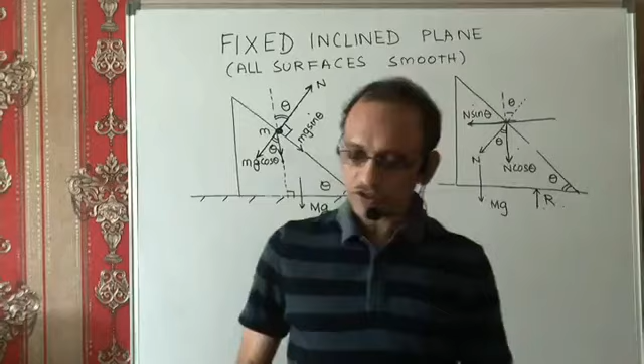While we are journeying into mechanics, one very important and critical element that we will encounter very often in problem solving and otherwise is the inclined plane element. And over a period of time, so many variants, so many variations around the inclined plane have emerged. And it is important to consolidate all inclined plane knowledge in one place.

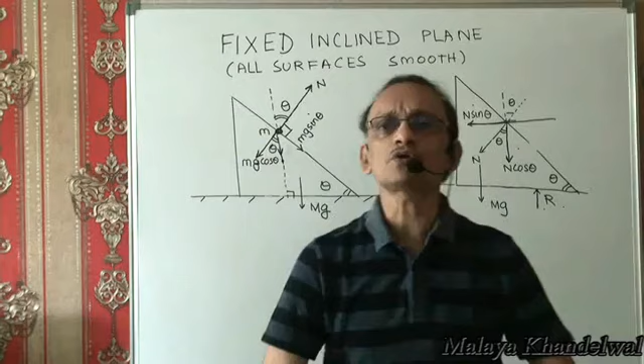It's important that we take delta steps and address all issues in all variants that we see in inclined planes. My objective in a few sessions is to give you a complete, holistic, comprehensive understanding of inclined planes. We start with an inclined plane whose surface is smooth, and we will initially look at an inclined plane that is at rest. Inclined plane not moving, a fixed inclined plane.

And slowly I'm going to release bundles of knowledge. From this point, a fixed inclined plane, I'm going to allow the inclined plane to move. And then look at the moving inclined plane in very many ways. Let's see what happens. All right. So here's our inclined plane. And there is a mass small m, a particle of mass small m, resting on the surface of a smooth inclined plane.

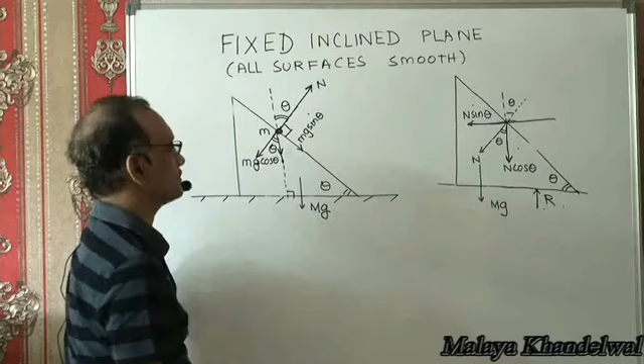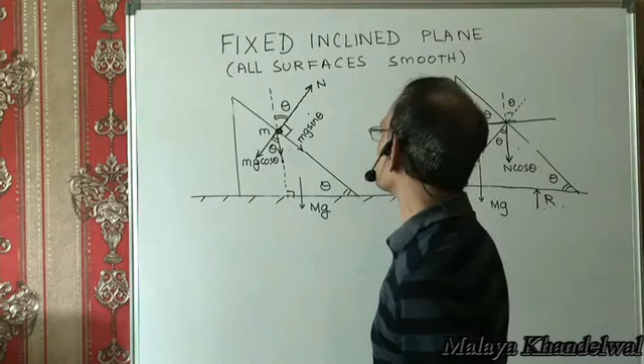So first things first, let's try and understand unequivocally, without ambiguity, the forces acting on small m. We are going to draw the free body diagram of the particle resting on the inclined plane, and we are going to draw the free body diagram of the inclined plane itself, right? So first of all, let me look at this small m. What are the forces acting on small m? Very clearly, there is mg downwards.

Vertically, this is the vertical direction, right? And there is normal reaction n, which makes an angle theta with the vertical. I hope you realize all these angle dispositions. If the inclined plane makes an angle theta with the horizontal, a normal to the inclined plane will make an angle theta with the vertical. Or you could have looked at it geometrically this way. This is theta, this is 90 degrees, this is 90 minus theta. So this will be theta, and then vertically opposite angle theta, and so on and so forth, right?

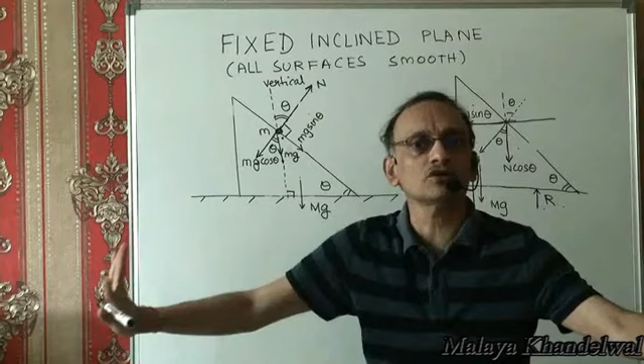And then we have n acting this way, perpendicular to the plane. That makes an angle theta with the vertical. So only two forces acting on small m. What are the two forces? mg like this, and n perpendicular to the plane. Yes or no? Now, since n and mg are in different directions, in order that we could deal with them in an organized manner, it makes sense to resolve all these forces in two mutually perpendicular directions.

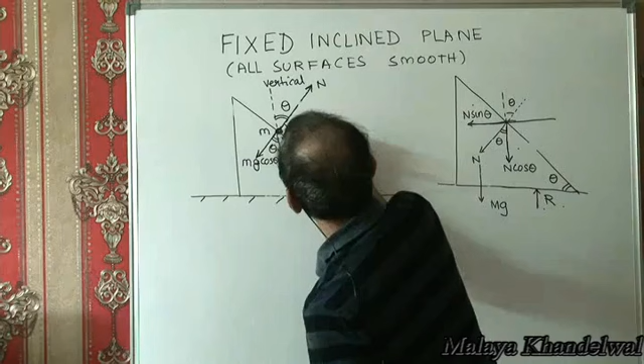What we could choose as two mutually perpendicular directions are, we could choose a direction parallel to the plane. This is the parallel direction. And a direction perpendicular to the plane. This is the perpendicular direction, perpendicular to the plane. So all forces in a certain sense can be consolidated in these two mutually perpendicular directions, or it could be any other choice, which is all right. Now, in the perpendicular direction, I could have resolved mg as mg cos theta perpendicular to the plane, right? And parallel to the plane would be mg sin theta.

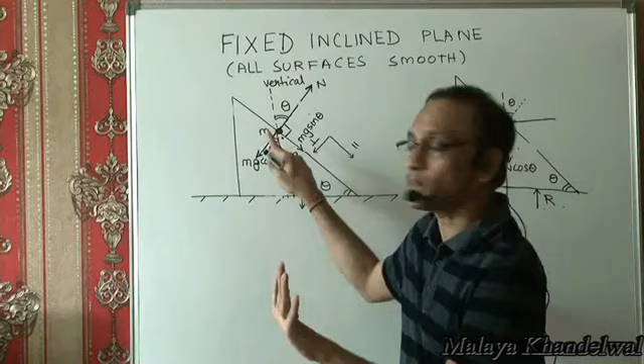So here we have the set of forces acting on small m: normal reaction from the inclined plane, perpendicular to the plane, and then mg, which could be replaced by two other forces, which is mg cos theta perpendicular to the plane and mg sin theta parallel to the plane. Yes or no, right?

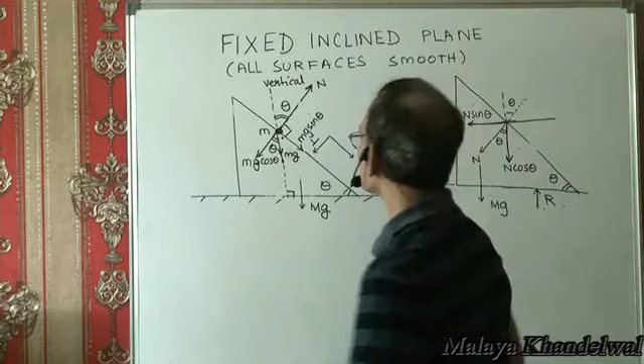Now, the inclined plane side of the story. So, on the inclined plane, what are the forces? Its weight, capital Mg acting downwards, normal reaction R from the ground. Now the inclined plane exerts on small m a normal reaction n this way, right? As a consequence of Newton's third law, small m will exert on the inclined plane a normal reaction n this way.

So then on the inclined plane, what are the forces? A normal reaction n, and who exerts this normal reaction n on the inclined plane? Small m, that is this particle on capital M. And then of course there is weight of the inclined plane, capital Mg, and there is normal reaction R. Now again, if you really think about it, in the vertical direction, the inclined plane has no acceleration. So n cos theta and Mg must balance R. R is a self-adjusting force, right? So R then, for the inclined plane, is capital Mg plus n cos theta.

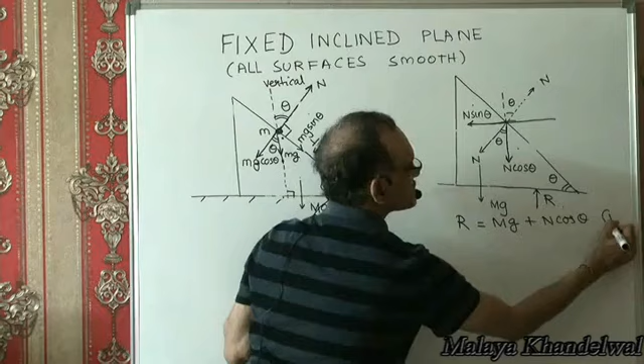Capital Mg plus n cos theta, right? In the vertical direction. Now, do you realize this n sin theta is unbalanced? And what would it want to do? It would want to cause the inclined plane to accelerate leftwards. So something has to prevent it from accelerating leftwards.

So what has to be done is, to keep the inclined plane fixed, we would have to counter n sin theta. So this n sin theta could have been countered, let's say, if I had placed it against a wall, for example. Or if the inclined plane was placed on a very rough surface, then the tendency of the inclined plane to move to the left owing to n sin theta would have been cancelled by frictional force acting on it to the right. Yes or no? Static friction acting to the right would have countered.

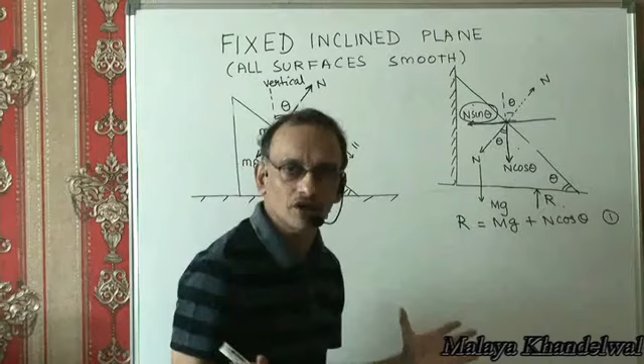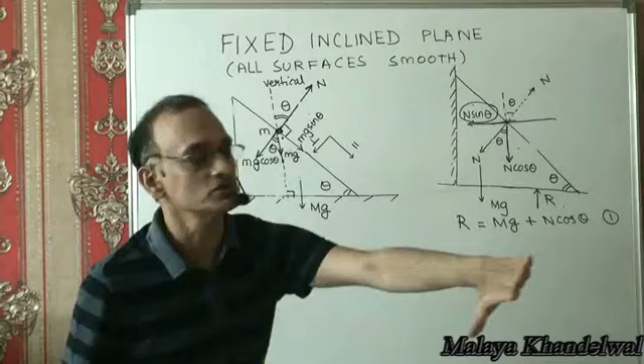One way or the other, by some means, we are preventing n sin theta from producing an acceleration on the inclined plane. The inclined plane remains unaccelerated, right? So this is the situation that we are talking of now. So unaccelerated inclined plane, fixed inclined plane, by some mechanical mechanism, n sin theta is countered. Now, look at small m.

Would you not want to believe that in a direction perpendicular to the plane, fixed plane, small m has no acceleration, because if in the fixed plane small m had an acceleration perpendicular to the plane, it is going to lose contact with the plane, right? So no acceleration in this direction of small m. That means net of all forces in this direction is 0. That means n must be equal to mg cos theta. But this is only for a fixed inclined plane. Only if the inclined plane is fixed will the normal reaction be equal to component of weight, which is mg cos theta. If the inclined plane was moving, we'll see very shortly that n is not mg cos theta.

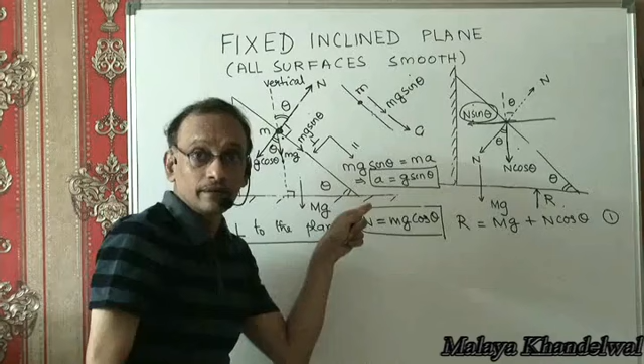Now, so on this particle, what's the only unbalanced force acting on this particle m? That's mg sin theta. That's the only unbalanced force acting. And what does this unbalanced force do? It produces an acceleration a parallel to the plane. So mg sin theta produces on the particle an acceleration a parallel to the plane, which means a then will be g sin theta. So on an inclined plane that is fixed and that has a smooth inclined surface, if a particle moves down the plane parallel to the plane, then its acceleration is going to be g sin theta. That's the story of a fixed inclined plane.

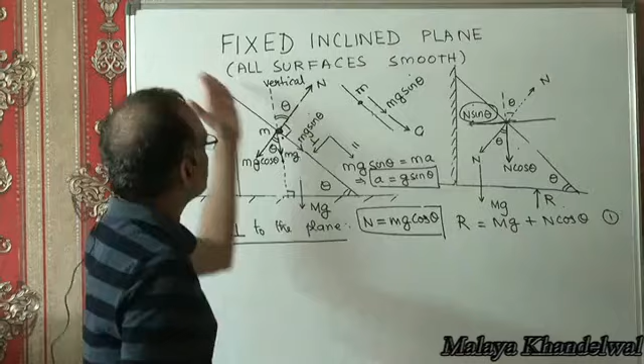What I'm going to next migrate to is I'm going to bear with the consequences of n sin theta not being balanced. That means I'm going to look at how n sin theta causes this to accelerate, and if n sin theta is left free to accelerate this, what would be the acceleration developed by the inclined plane on capital M? This is what I'm going to explore next, right? But I hope all of you understand this very basic premise of a fixed inclined plane whose inclined surface is smooth. The acceleration of a particle parallel to the plane is g sin theta. There is no acceleration perpendicular to the plane. Acceleration perpendicular to the plane would have caused the mass small m to lose contact with the plane. Yes or no? Thank you so much.

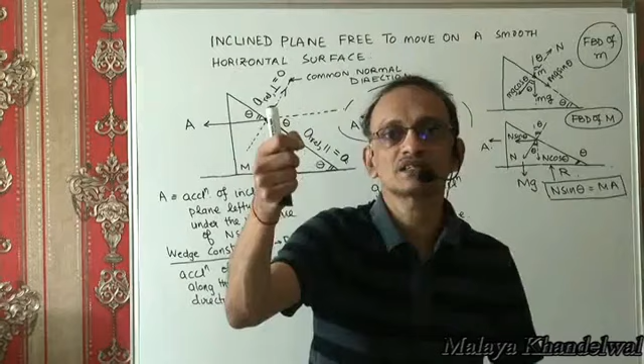As a follow-up from the previous situation where I looked at a fixed inclined plane, I'm now going to let the plane do what it wants to. I'm going to make it rest on a smooth horizontal surface. The inclined plane itself is smooth and there is a particle of mass small m moving along the plane, right? I'm going to have a detailed discussion of this, and we'll look at it in very many ways. All right.

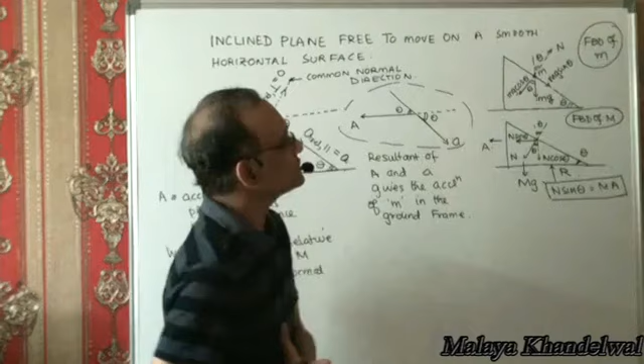So first things first. This is a particle of mass m resting on the inclined plane. What are the forces acting on it? There is mg, Mother Earth, and there is normal reaction from the inclined plane perpendicular to the plane, right? These are the two forces acting on small m. That far and no further. I'm assuming that this surface is smooth. Of course, if required, we could resolve mg perpendicular to the plane as mg cos theta and parallel to the plane as mg sin theta. But that's it. I mean, we could resolve it in other ways too.

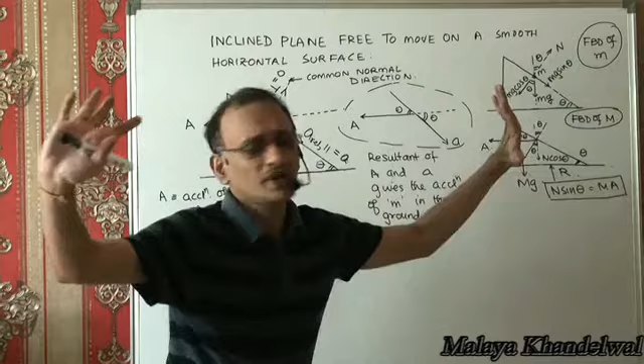But this is one of the ways we could resolve mg. If we want to deal with two standard directions, parallel to the plane and perpendicular to the plane, this is one thing that we could have done. Now, look at the inclined plane side of the story.

What are the forces acting on the inclined plane? This is the inclined plane. There is capital Mg acting downwards. There is normal reaction from the ground acting upwards, right? And if the inclined plane exerts on small m, N like this, small m will exert on the inclined plane a normal reaction N like this, right? Which could be resolved as N cos theta downwards and N sin theta leftwards.

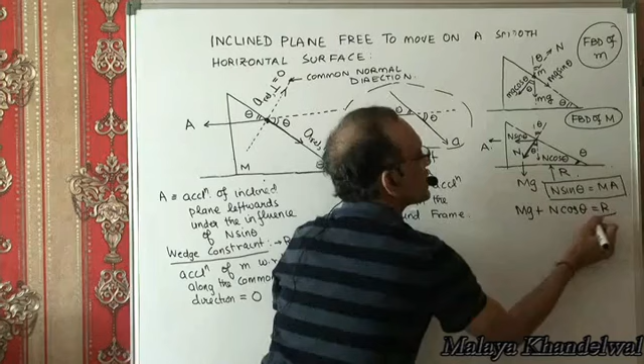Yes or no? Then from the ground, there is a normal reaction acting on the inclined plane, preventing the inclined plane from having a vertical acceleration. So essentially, from the inclined plane perspective, Mg and N cos theta balance R. R is a self-adjusting force. It manipulates itself in a manner that there is no net acceleration of the inclined plane in the vertical direction, right? That's as far as this is concerned.

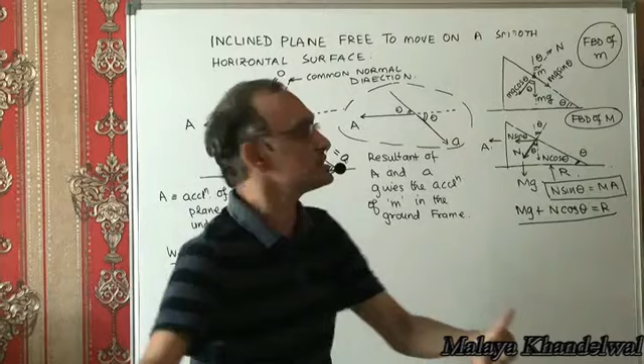But what about N sin theta? Now, there is nothing to counter N sin theta. There is no friction. Everything is smooth. And there are no other forces acting. So, N sin theta stays put as an unbalanced entity on the inclined plane, capital M. This is capital M. So, N sin theta produces on capital M a leftward acceleration, capital A. So the inclined plane has a leftward acceleration capital A owing to the influence of this N sin theta. Yes or no? I hope all of you are in tune with me and in sync with whatever I'm saying. Right?

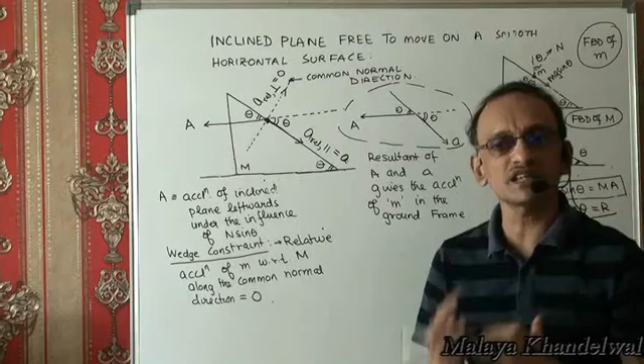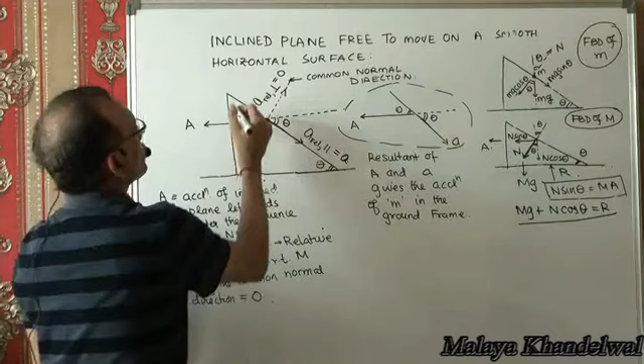Now, if you are an observer sitting on the inclined plane, what would you observe about this particle? You would observe that the particle is sliding along the plane. That means, what would you want to conclude? You would want to conclude that the relative velocity of small m with respect to capital M is parallel to the plane. The relative acceleration of small m with respect to capital M is parallel to the plane. There is no relative motion in this direction.

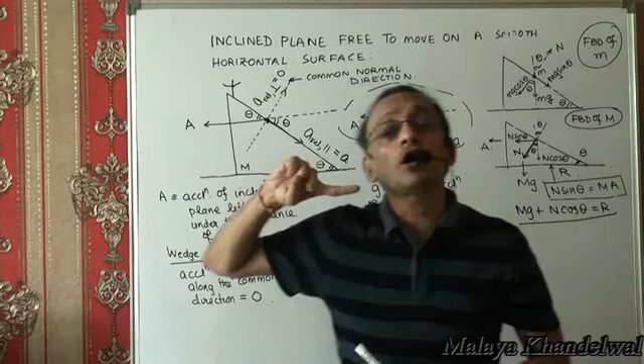Along the common normal, if there was relative acceleration or relative motion of any kind, then it would result in loss of contact. There is no loss of contact. So, relative acceleration perpendicular to the plane is 0. But there is non-zero relative acceleration down the plane. An observer on the plane would not find this particle to have an acceleration perpendicular to the plane, but would observe an acceleration small a parallel to the plane. So this is the relative acceleration of small m with respect to the inclined plane, and at least we know its direction, it's parallel to the plane.

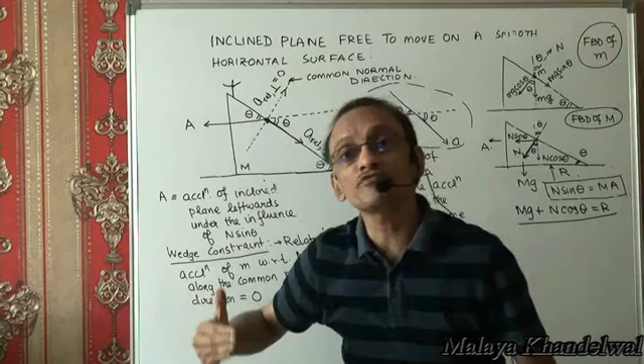And the fact that there is no relative acceleration perpendicular to the plane between the inclined plane and this mass m is because of a wedge constraint. That's the condition for it to maintain contact. So no relative acceleration in this direction. So whatever acceleration the inclined plane has in this direction is also the acceleration of small m in this direction, so that the relative acceleration condition equal to 0 is preserved. So on small m, this is small m.

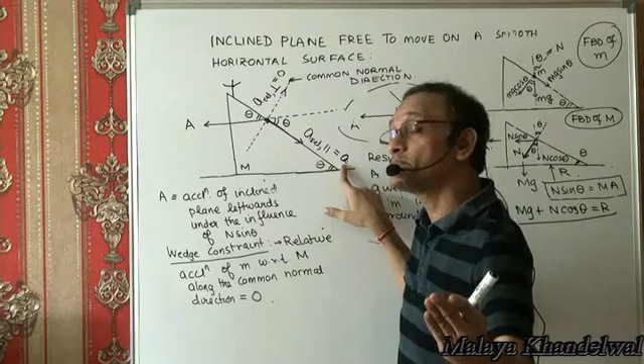What are the two things that you are going to see on small m? One, there is relative acceleration like this, right? That is the inclined plane observer's perspective, this small a. This is not, however, the acceleration of small m in the ground frame. No, this is not the observation made by a ground observer. This is the observation made by the inclined plane. The inclined plane observer reports that small m has an acceleration like this. Yes or no, right? So this is only relative to the inclined plane.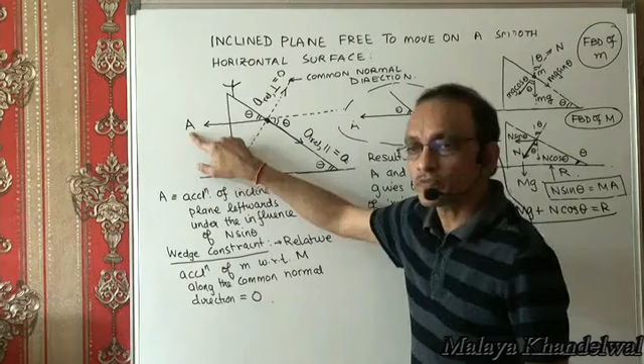But what about the inclined plane itself? Is it fixed? No, it has an acceleration capital A to the left. So this is the observer's acceleration. And what is the observer reporting? This. So if I add the observer's acceleration to the relative acceleration it is reporting, relative acceleration added vectorially to the acceleration of the observer, that means capital A and small a, would give me what? Acceleration of the particle m in the ground frame. So in the ground frame, you would see a resultant of the relative acceleration of small m plus the acceleration of the inclined plane. The inclined plane reports this. So the reporting of the inclined plane plus whatever is happening to the inclined plane will give me a ground observer's framework.

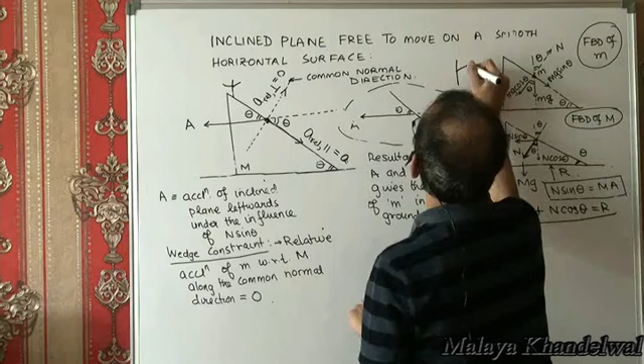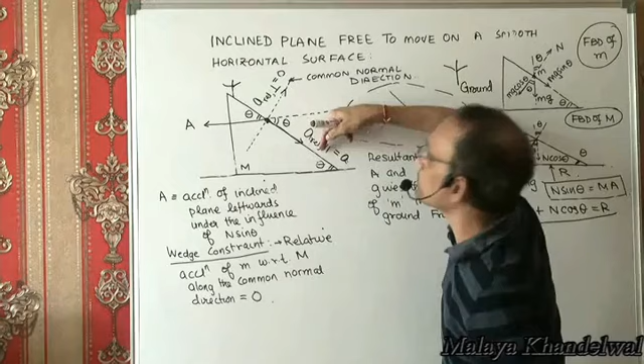If this was a ground observer, then the ground observer would think that the resultant of the relative acceleration plus the acceleration of the observer, which is the inclined plane, capital A, this angle is theta, as you can see, would give me the acceleration of the particle m in the ground frame. In the inclined plane, small a. In the ground frame, resultant of small a and capital A, that's the story in the ground frame.

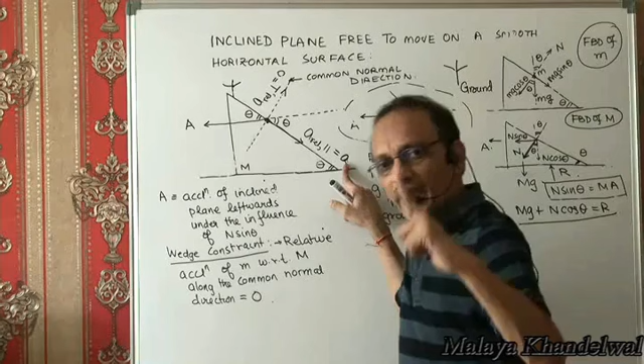Yes or no? Right? I'm going to build on this. Once you understand this clearly, small a henceforth is what? Acceleration of small m with respect to the inclined plane. Obviously, it's along the plane. And capital A is what? Acceleration of the plane.

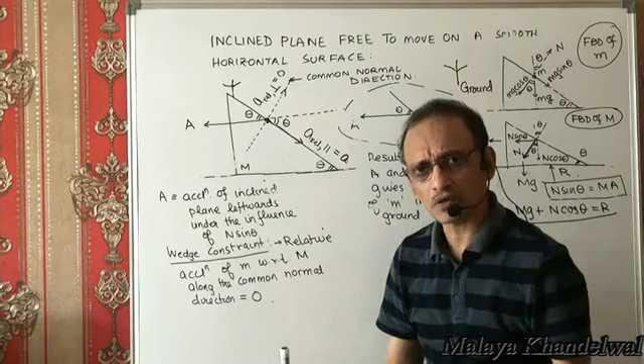If I add these two, this is the observer and this is what the observer is reporting. The kinematic status of the observer and its reporting will together give me what? The absolute acceleration of the particle, that is the observed, right? I'm going to build around this.

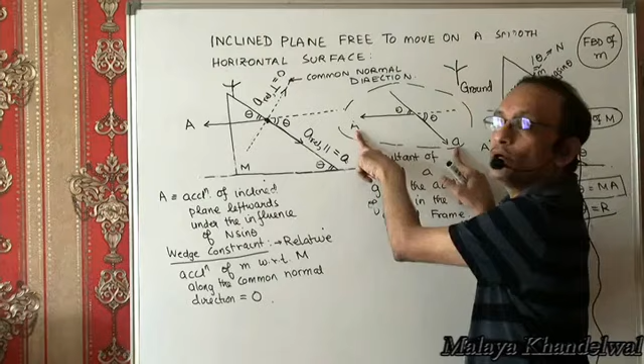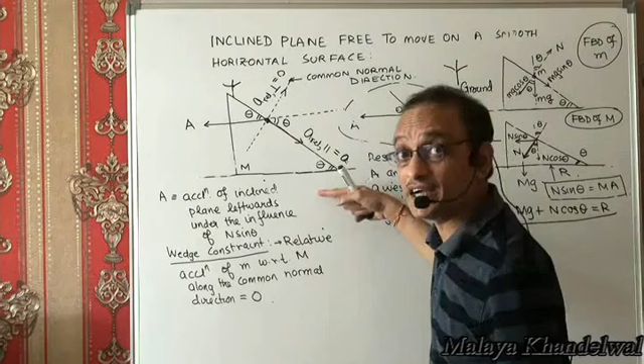So I'm going to write equations of motion for small m, keeping in mind that whatever forces act on small m will produce a net effect, which is the resultant of small a and capital A. The net effect of small a and capital A would be the effect of all forces acting on small m. Now, whether I choose to resolve forces perpendicular to the plane and parallel to the plane and write equations of motion of small m in those directions, or I resolve forces vertically and horizontally and look at the effect in a horizontal sense and in a vertical sense, that does not matter.

That is only cosmetic. But in principle, this is what I'm going to deal with. This being the effect in a ground frame perspective, small a and capital A put together is a net effect in the ground frame, and I'm going to look at forces acting on small m that will produce this effect. Cosmetically, I might do very many things, but in principle, this is what I'm going to deal with.

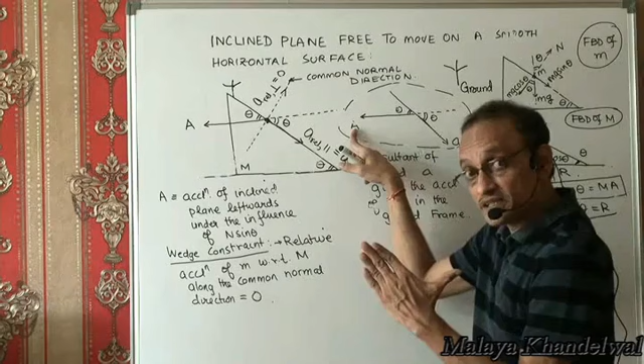In my session that is to follow, I'm going to come down to equations in two mutually perpendicular directions. Aim at solving capital A, the acceleration of the inclined plane, and solving small a, which is the relative acceleration of small m with respect to capital M, that means the inclined plane. And then, of course, I could find the resultant of these two. That will give me the net acceleration in the ground frame. So that's my agenda for the session to follow very soon.

To eventually converge to a solution of the inclined plane problem based on some of the inputs that I gave to you, where I said small a is the relative acceleration of the particle with respect to the inclined plane, which would be evidently along the plane, and capital A is the acceleration of the inclined plane itself because of an unbalanced N sin theta, which we saw earlier. Then the resultant of small a, relative acceleration, with the acceleration of the observer, would give me the acceleration of the particle in the ground frame.

Now, therefore, I have to essentially find the resultant of small a and capital A so as to perceive the acceleration of small m in the ground frame. So I resolve capital A as A cos theta parallel to the plane and A sin theta perpendicular to the plane, right? So essentially, if I add A cos theta, A sin theta, and small a, this resultant will give me the acceleration of small m in the ground frame, right?

Therefore, in the ground frame, what's the acceleration parallel to the plane? Small a minus capital A cos theta. Small a minus A cos theta is the acceleration of small m in the ground frame. So this is all in the ground frame. Whereas A sin theta is the acceleration perpendicular to the plane, as seen by a ground observer. So the ground observer sees a minus capital A cos theta parallel to the plane and capital A sin theta perpendicular to the plane on small m. So this is the effect of whatever is happening on small m.

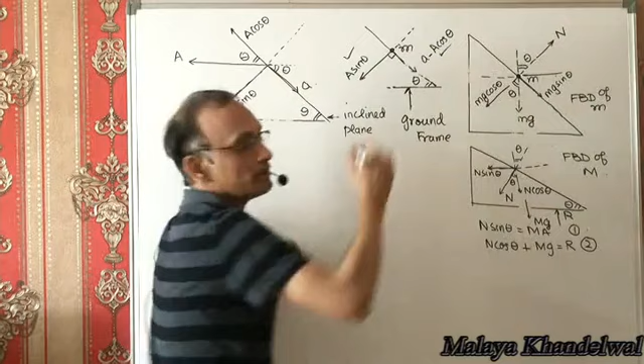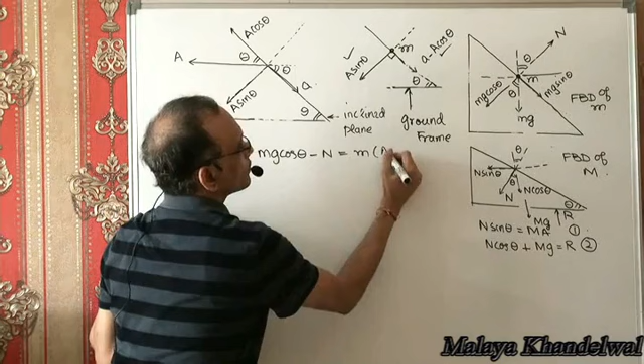What is the cause? So what causes A sin theta on small m? All forces perpendicular to the plane will result in capital A sin theta. What are the forces perpendicular to the plane? Mg cos theta minus N. Mg cos theta minus N will cause A sin theta, right? So that's equation 3.

So equation 1 was like the inclined plane having an acceleration capital A, as we saw earlier, because of N sin theta. N sin theta is capital M into capital A, right?

Now parallel to the plane, what's the acceleration? a minus capital A cos theta. And what causes that? All forces parallel to the plane, that is mg sin theta. So mg sin theta causes small a minus capital A cos theta. This acceleration. That's equation 4, right?

So what I'm going to do is use equation 1, which is this equation, and equation 3, which is this equation, and first solve for N. From this equation, as you can see, I can replace N by capital M A by sin theta into this equation. And first I'll solve for capital A, the acceleration of the inclined plane. See what it turns out to be.

So this is mg cos theta minus N, replaced by capital M A by sin theta, equals small m a sin theta, right? I transpose this to this side. I get mg cos theta equals A into, if I add these two, capital M plus small m sin square theta divided by sin theta. That's what happens. A then turns out to be mg cos theta sin theta divided by capital M plus small m sin square theta. That's the acceleration of the inclined plane.

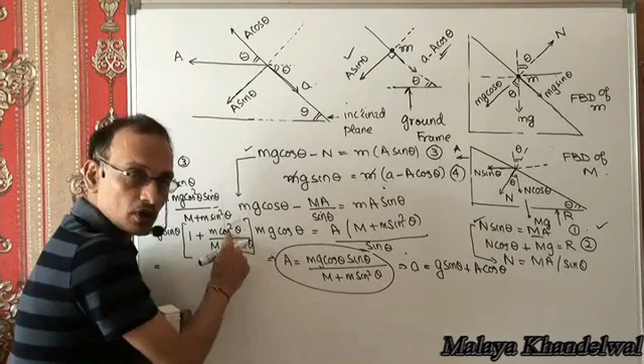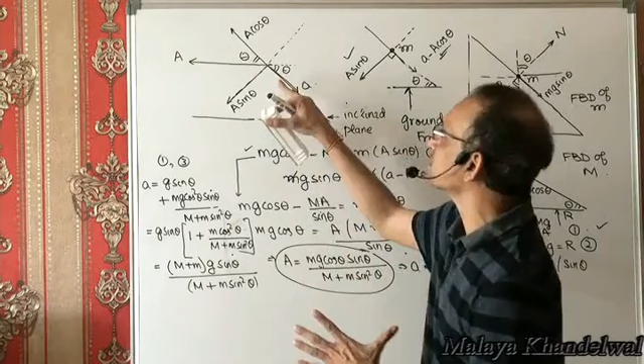Let's see what this turns out to be. If I add small m sin square theta plus small m cos square theta, that will give me m. So capital M plus small m in the numerator: capital M plus small m into g into sin theta divided by capital M plus small m sin square theta. So here we have, eventually, after a lot of detailed analysis and discussion, the acceleration small a with respect to the inclined plane available to us, and the acceleration of the inclined plane as well, right?

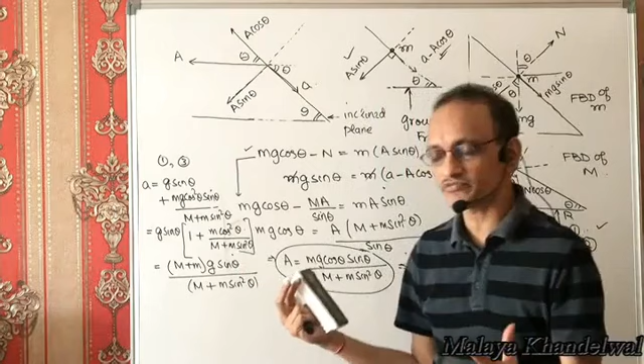Now all that I need to do is, if I vectorially add small a and capital A, I'm going to get the net acceleration in the ground frame of reference. Yes or no, right? So this does seem like an interesting situation to deal with. Here what I did was the basic premise of adding the relative acceleration to the acceleration of the observer, which is the inclined plane, and then looking at forces on the particle small m, this time writing their net effect perpendicular to the plane and parallel to the plane. I could have looked upon their net effect in the vertical direction and horizontal direction as well, which is what I'm going to address in a short while.

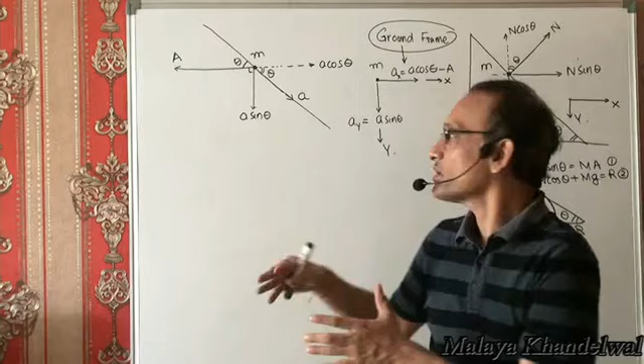In the session that just concluded, I obtained the acceleration capital A of the inclined plane, right? mg sine theta cos theta by capital M plus small m sine square theta, etc. I also obtained the relative acceleration of small m with respect to the inclined plane along the plane, right? And I said to you that the resultant of these two will give me the acceleration in the ground frame, right?

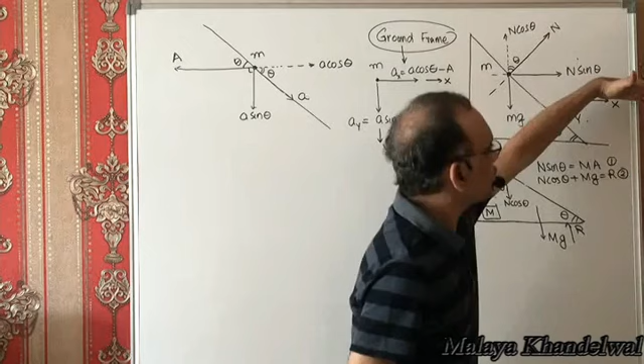And what I did was, with this basic premise of capital A and small a giving me the net acceleration in the ground frame of reference, I chose to write my equations of motion in two mutually perpendicular directions, perpendicular to the plane and parallel to the plane, right? Now I'm not going to do anything new. All that I'm going to do is write my equations of motion along the horizontal direction, which I'll call the x direction, and in the vertical direction, the direction of Mother Earth, and that is the y direction.

And I'm going to show to you that we are not getting anything different. Why should it be different? The whole thing is very well cemented and bonded. So no matter what, if we don't goof up, we'll get the same thing, right? So like I said, the resultant of small a and capital A will give me the net acceleration. And this time I choose to look at things horizontally and vertically.

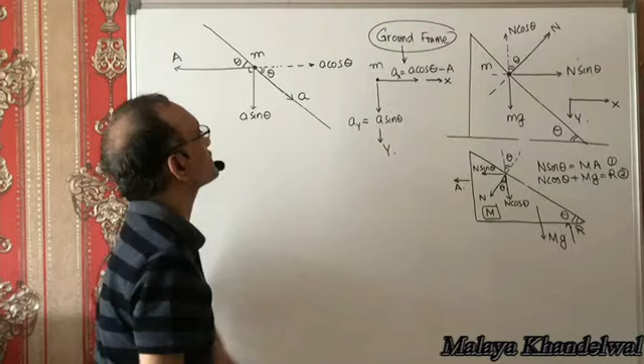So in the horizontal direction, the net acceleration in the ground frame is going to be this small a resolved in this direction as a cos theta, and capital A. So a cos theta minus capital A, right? A cos theta minus capital A is the acceleration of small m along the x-axis. In the y direction, it's like a sine theta this way, right? So in the ground frame, Ax is a cos theta minus capital A. In the y direction, Ay is a sine theta, and I'm going to apply Newton's second law along the x-axis and along the y-axis based on these forces.

What are the forces acting on small m? There is mg like this, and there is capital N perpendicular to the plane. And N could be resolved in the y direction, vertical direction, as N cos theta, and horizontal direction as N sine theta. Clearly, mg minus N cos theta will produce ay, and N sine theta will produce ax. This is what's going to happen, right? And of course, like before, from the inclined plane perspective, N sine theta is capital M into A, which is the unbalanced force acting on the inclined plane, causing the inclined plane to have an acceleration capital A to the left, right? Good.

So let me write equations of motion along the x-axis and along the y-axis. So along the x-axis, for small m, we have N sine theta acting on the mass small m to produce ax, m into a cos theta minus capital A. This is what it's doing, right? That's as far as N sine theta is concerned.

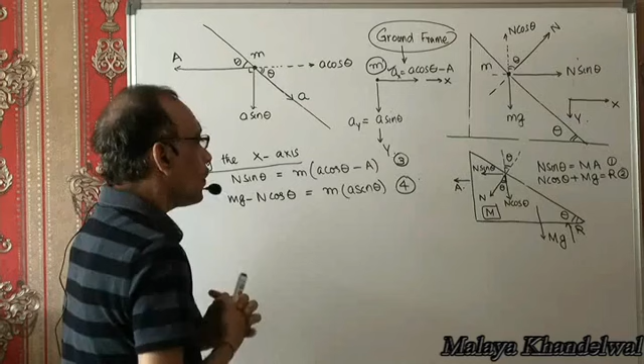What about the vertical direction? Let me call this equation 3, because these were equations 1 and 2. In the y direction, I have mg minus N cos theta, and that's going to give me mass into a sine theta. That's equation 4. All that I therefore need to do is to solve for small a, capital A and N from this equation and equation 1. This is what I need to do, right?

And we are not going to get anything different from what we got earlier. If I solve for capital A from these two equations, let me tell you the final result, if you allow me. I'm going to get capital A as mg sine theta cos theta divided by capital M plus small m sine square theta, not any different from before, and small a as capital M plus small m g sine theta divided by capital M plus small m sine square theta. This is what I'm going to get as capital A and small a.

So this is just to make sure that you understand that all roads lead to Rome. I have not communicated anything different. It's just that I chose to be cosmetically different. But eventually, being cosmetically different doesn't mean that you're going to get different conclusions out of that. Conclusion would be the same. You might take different routes. But as long as you're not goofing up algebraically or conceptually, taking any route is fine, and resolving forces along the y direction and the x direction and writing equations of motion commensurately also did the job for us.

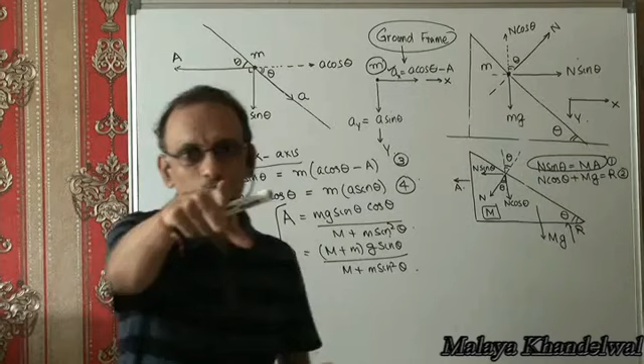Next, I'm going to look at the same problem. I have written my equations of motion from a ground perspective. I've taken only real forces, N and mg, on small m, the particle, and I have applied equations of motion along the x direction and the y direction and solved the problem. That is in a ground frame.

So all my solutions so far have been in the ground frame, but I'm not averse to the idea of looking at the same problem in a frame of reference attached to the inclined plane, which would be my next agenda.

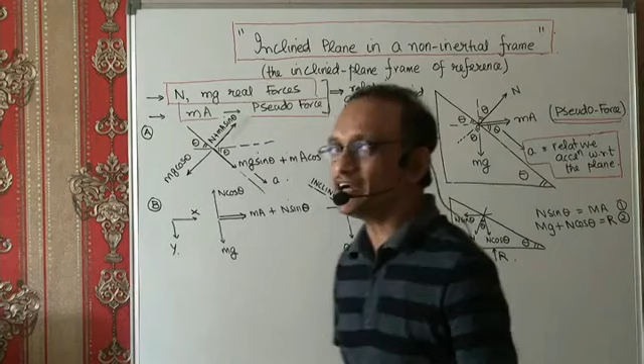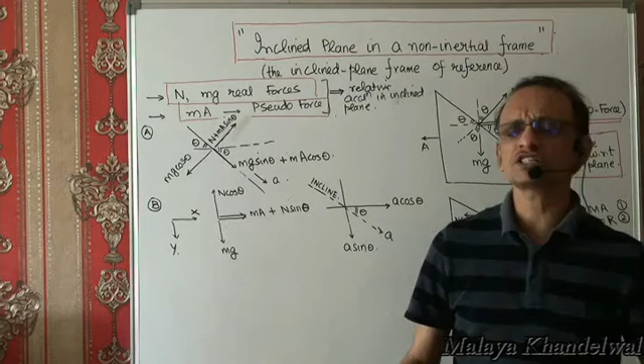We're not done with inclined planes. I'm inclined to tell you more. We've dealt with the inclined plane free to move on a smooth horizontal surface, and we've obtained the acceleration of the inclined plane with a particle of mass small m sliding down the inclined plane. No friction anywhere, so far smooth.

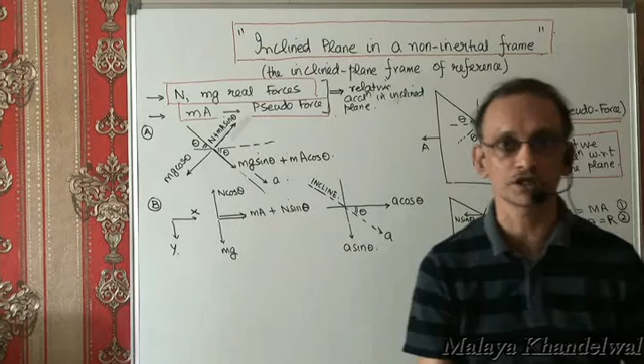We've dealt with the same thing in a few ways, but I'm going to now deal with the inclined plane with the frame of reference, or the observer, being the inclined plane itself. That means we're going to solve the problem in a non-inertial frame. The inclined plane is an accelerated frame. As we have seen before, the inclined plane has an acceleration A to the left, courtesy N sin theta. We've done this so many times. So N sin theta is MA.

So now look at small m. We're going to look at small m in the inclined plane frame of reference. In this non-inertial frame, if I have to apply Newton's second law, then to the set of real forces N and mg, I need to add a force minus m times the acceleration vector of the inclined plane. So, small mA to the right is the pseudo force. Then, together with N, mA and mg, real and pseudo forces coming together, what would that produce?

That would not give me the acceleration in the ground frame. That is going to give me the acceleration small a of the particle in the inclined plane frame of reference, which we already know is along the plane. So the resultant of all these forces, N, mA and mg, is going to be an acceleration a down the plane. That being the basic idea.

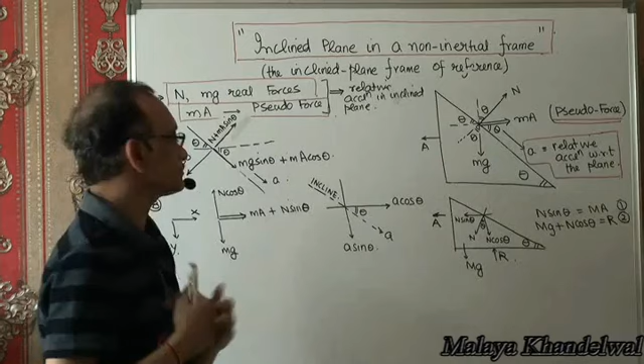I could have written my equations of motion for small m parallel to the plane and perpendicular to the plane, or in the vertical direction and in the horizontal direction. If I choose directions parallel and perpendicular to the plane, then parallel to the plane the set of real and pseudo forces is going to be mA cos theta plus mg sin theta. Perpendicular to the plane, it is N plus mA sin theta, and there is mg cos theta like this.

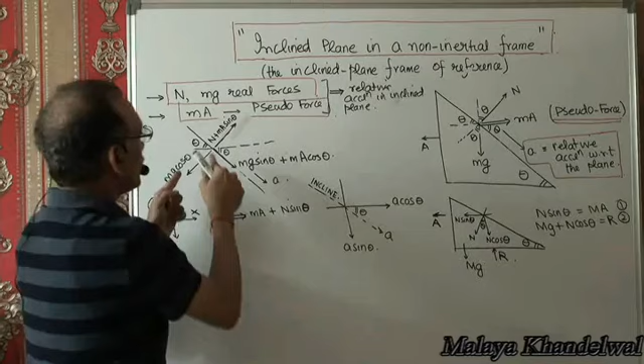Now, these forces will give me what? Relative acceleration. But the relative acceleration of small m perpendicular to the plane has to be 0, keeping in mind the wedge constraint, the condition so that small m maintains contact with capital M. So the net of all forces in this direction has to be 0, because there is no relative acceleration in this direction. So very clearly, N plus mA sin theta must just about balance mg cos theta. That's as far as this is concerned.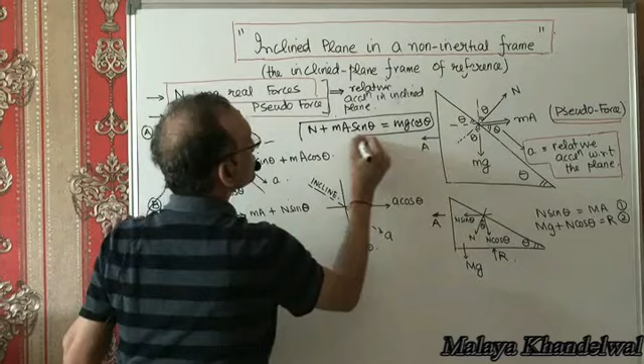And in this direction, they produce an acceleration small a. So along the plane, we have the equation of motion as mg sin theta plus ma cos theta equals small m into a.

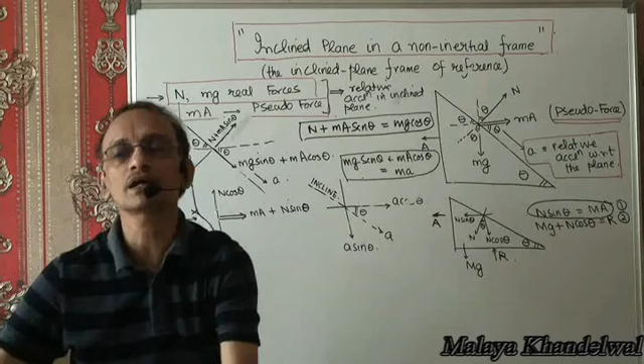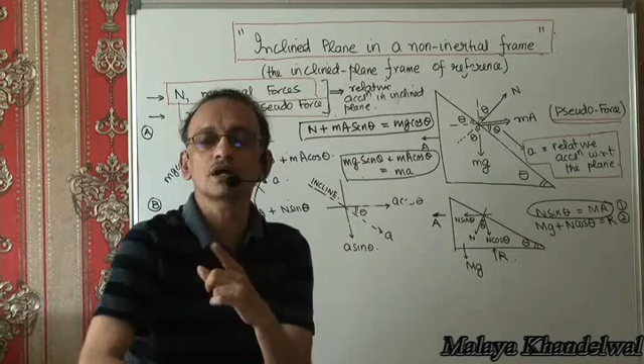So using these two equations once again, along with, of course, N sin theta equal to Ma, which remains cardinal all the time, I can once again solve for capital A, N, and small a. Capital A, like before, will turn out to be mg sin theta cos theta divided by capital M plus small m sin squared theta. Similarly, small a will turn out to be (capital M plus small m) g sin theta divided by (capital M plus small m sin squared theta). That is what is going to happen.

I could have solved the same problem by resolving my real and pseudo forces horizontally and vertically. In the horizontal direction, I clearly have ma plus N sin theta. In the vertical direction, I have mg and N cos theta. And what do they do?

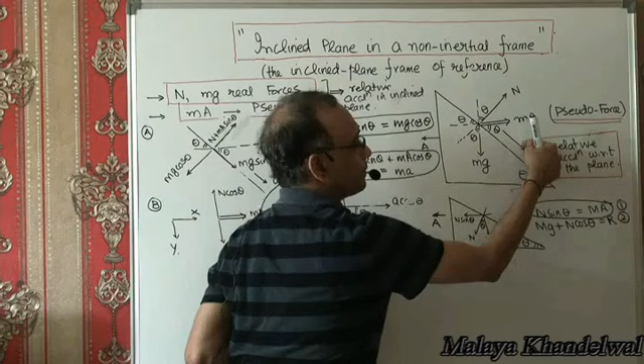Look, the acceleration in the inclined plane frame of reference is small a, which has a horizontal component, as you can see, a cos theta, and a vertical component a sin theta. Who's instrumental in producing a cos theta? ma plus N sin theta, right? ma plus N sin theta results in ma cos theta, right? The real plus pseudo forces give me what?

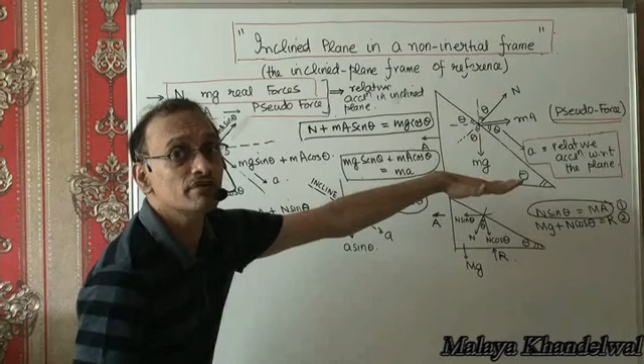Relative acceleration. So relative acceleration in this direction is a cos theta, in this direction is a sin theta. In this direction, who causes relative acceleration a cos theta? ma plus N sin theta. In the vertical direction, what's the equation of motion? mg minus N cos theta equals m into a sin theta. So then I have this equation, along with this equation, N sin theta is capital M into A, giving me the values of capital A and small a.

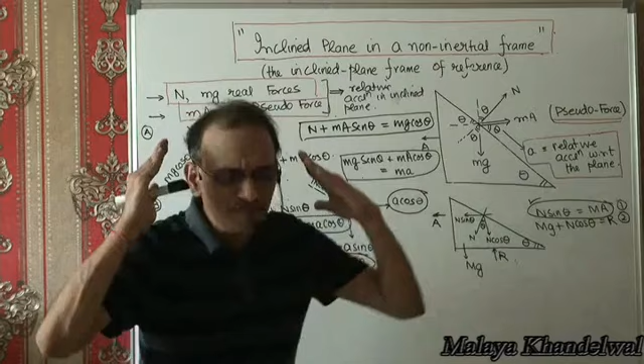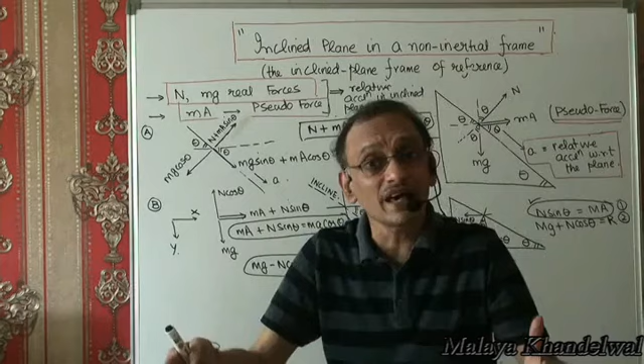So we've learned in a certain sense how to deal with this problem in the ground framework, in the inclined plane framework, and by resolving forces parallel and perpendicular to the plane, as well as resolving forces vertically in the direction of Mother Earth and horizontally perpendicular to the direction of Mother Earth. So I'm assuming that you're getting a hang of things and that you're feeling comfortable with it. But I'm still not done. I'm going to demonstrate yet another concluding aspect of the same thing.

They are all cosmetically different. Deep within, they converge somewhere. But I will demonstrate another way of handling this problem so that it gives you mental comfort dealing with these situations. Thank you so much. Bye.

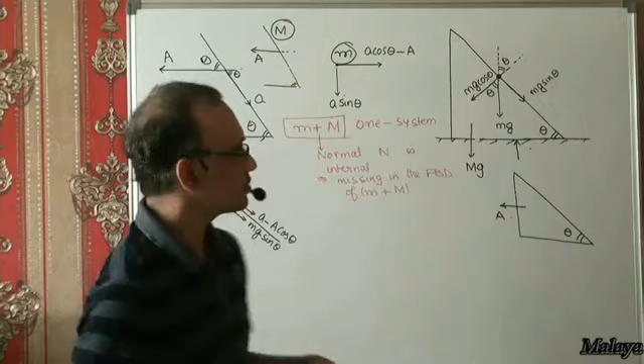I'm going to present to you a closing remark on this variety. However, there are more variants on the inclined plane that I'm going to deal with, but this one variety where the inclined plane has an acceleration capital A to the left, the particle of mass small m has an acceleration small a down the plane, right?

And I'm going to look upon capital M and small m as one single system, and I'm going to apply the generalized second law to it. When I apply the generalized second law, realize that on a system comprising small m and capital M, there is no net horizontal force, which means mass small m into acceleration of small m in the horizontal direction plus mass capital M into acceleration of capital M in the horizontal direction must be 0. So if this is my horizontal direction, then if I look upon capital M plus small m as one single system, right, then the generalized second law means Fx in this direction must be 0. Net of all forces. Capital N will not feature. Normal reaction between small m and capital M will not feature in this. Why? Because that's an internal force.

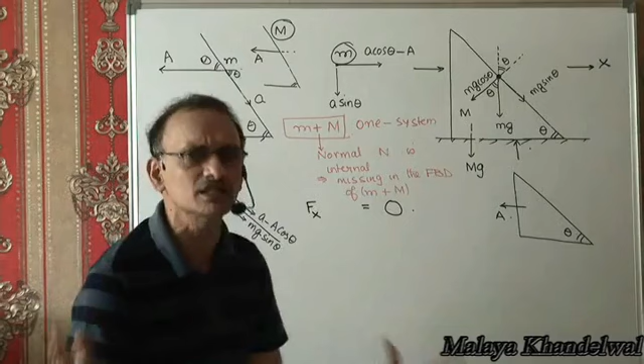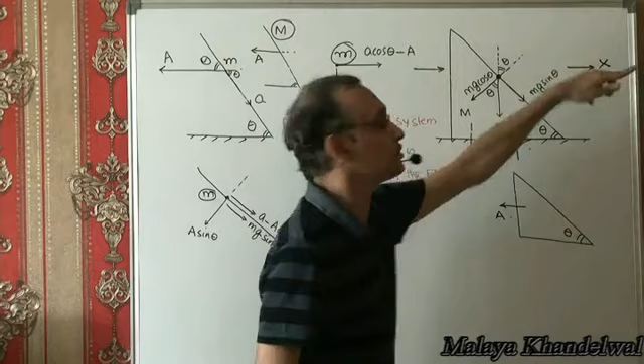So then, what is Fx in the horizontal direction? Generalized second law, mass into acceleration of small m in the horizontal direction. What's the acceleration of small m in the horizontal direction? As you can see, a cos theta minus capital A. Small m into a cos theta minus capital A, right? Plus mass of the inclined plane into acceleration of the inclined plane, which is A to the left, so minus A. That must be 0. That's 1.

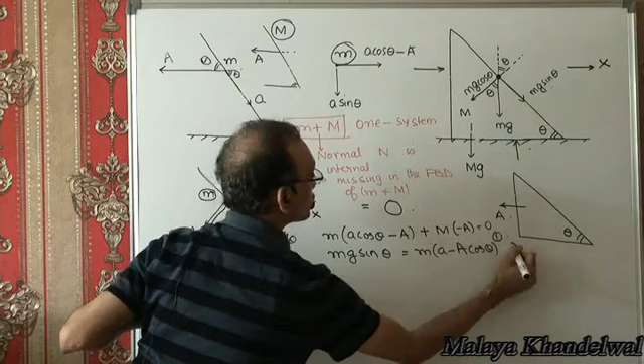Now, let me look at small m parallel to the plane. What is its acceleration parallel to the plane? Parallel to the plane, its acceleration is small a minus capital A cos theta. And who causes that acceleration? mg sin theta causes that acceleration. So then we have mg sin theta instrumental in doing small m into small a minus capital A cos theta. Yes or no? Does it make sense to you? Right?

If I solve these two equations, once again I can get the value of small a and capital A without having to deal with normal reaction N. So I'm going to get the same values of small a and capital A as I got earlier. But this is like applying Newton's second law on small m plus capital M together, right? And I hope you're feeling comfortable with things. You are at home and in tune with all of this.

But then, given this basic look of an inclined plane, we are going to add pulleys, we are going to add friction, and we are going to do a variety of things and make you very, very comfortable with the whole notion of inclined planes.